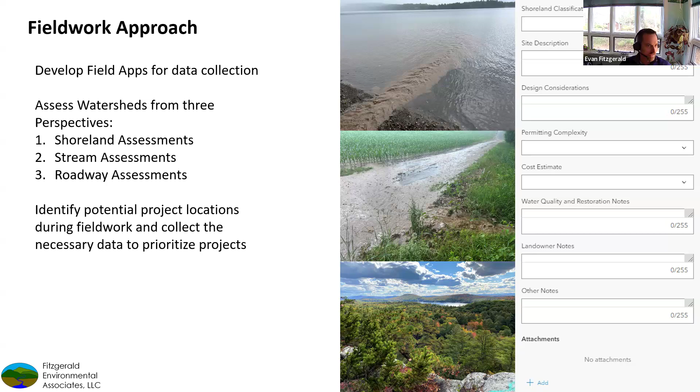Once we identify projects, we start evaluating their costs and benefits and different merits. These are just some examples on the screen of outputs from scoping projects in a little more detail, and then running through what we call a prioritization matrix. That's where we're looking at the water quality benefits of each project and the actual cost. At that point, a pretty preliminary ballpark cost to implement, and looking at some other

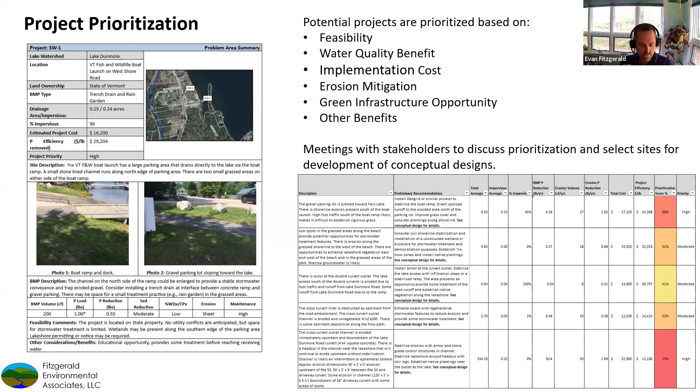things that we weigh with you all as partners in the process of trying to whittle a long list of sites. Typically, we've got like 20 or 30 project sites that we scout. Sometimes more. I think on Dunmore we had like 40 or 50, and then trying to work with you all as partners to whittle that list down to 3 or 5 sites. That was just a recap I wanted to give of how we get to the 30% design.

So once those projects are picked for 30% design, what we're doing next, and I think the first and most important part to make sure the project is feasible and eligible to move forward, this one's pretty obvious: making sure the landowner is on board. And I would say public lands are often where we go first. A bunch of the examples I'm going to show you are from fish and wildlife access areas or town property. And they're an obvious partner because the state or the town are often similarly invested in clean water as you all are as lake organizations. So that's obviously the first and most important step.

Coordinating with landowners too, to make sure they understand as we flesh out the concept design what the changes will be and what they can expect, to make sure there's no major concerns about the proposal up front. That's a really important step. And then on our end as designers and engineers, we're looking to collect more data than what we did in the initial scouting, initial site visit.

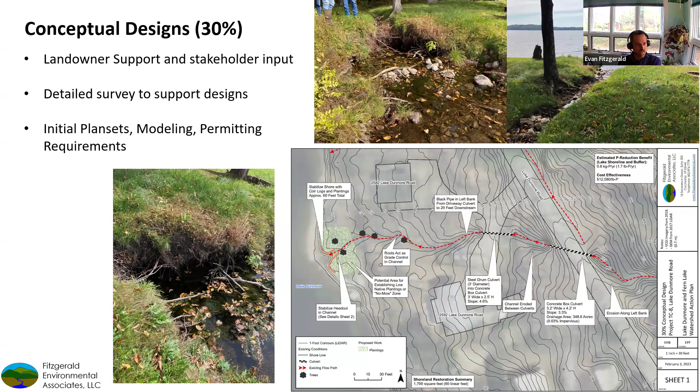So what I wanted to do next was just run through a handful of sites where we went from the concept level design to the final design and then implementation. A number of these are from Lake Dunmore and some of the earlier LWAPs that we did like on Lake Eden, because a lot of those LWAPs that are a little bit older have had more time to advance through the design and implementation process. So this site is the Magoon Boat Access. It's on the west side of Lake Dunmore.

It's kind of a long, skinny parking area. As you can see, it's all sloping down toward the water. And again, these boat accesses are great opportunities often because there's gravel surfaces that are pitched toward the lake, and if we're lucky, there's a little bit of green space in between the parking area and the lake to do a little treatment. So that's what we had here. And you see there's a couple of green areas identified. These were later designed for bioretention basins.

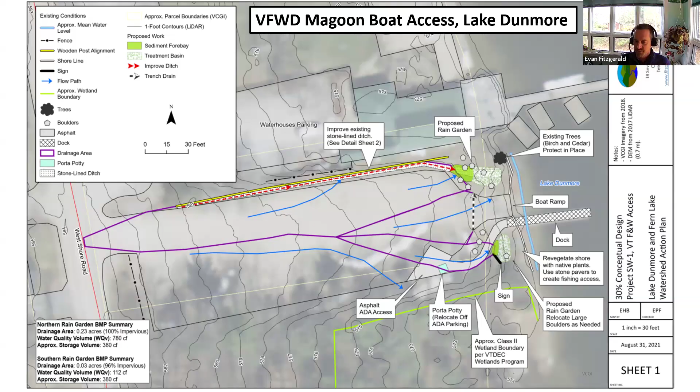And honestly, if I flip from this concept design to the final design, you'll see a change from a more colorful illustration to a more bland, grayscale engineering drawing. It really didn't change that much. But of course, we have to flesh out the level of detail and create what we call contract documents, something that we reference with the contractor, and that, in this case, the Dunmore Fern Lake Association and the contractor and us as engineers overseeing the project can reference and make sure that we're staying on task.

So jumping to the final design, you see we have the trench drain as was shown on the previous version, the couple bioretention basins, and really not a lot of change, just a lot more detail. We fleshed out how big these basins needed to be, at what elevations, what size trench drain, what the swale looked like on the north side, etc.

So here's a few photos of the work shortly after it was completed, and then I think about a year after it was completed when the vegetation was growing in. So to jump from that 30% design to final design, you need more survey data to refine those elevations. You need to identify more clearly the resources that might be of concern to the regulatory folks, where the ordinary high water level is on the lake, where wetlands are and their buffer zones, if there are wetlands, that sort of thing.

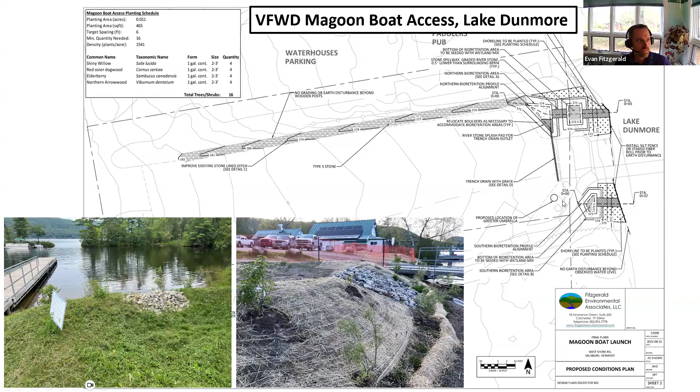That's one example. Here's another example up in Eden. Again, this is a town property. This is the town beach on the west side of the lake. Here's a concept design that shows a small bioretention basin receiving runoff from a portion of a parking lot and a road. And now jump to the actual design. We see a little bit more detail here with what we call a grading plan.

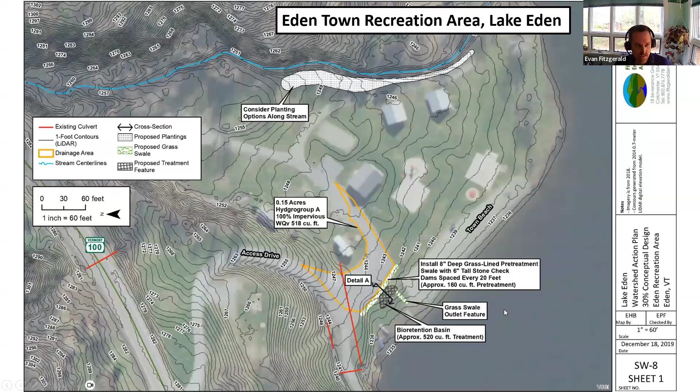All right, going back to Lake Dunmore. This is Branbury State Park, again, public property, working with Department of Forests, Parks and Recreation, another willing partner on these state lands. This is a concept design that shows some shoreline restoration, areas that had been experiencing some erosion. If any of you know Branbury State Park, it's pretty much grass right down to the water in a lot of places. And this project was intended to allow some of that near shore area to revegetate and recover.

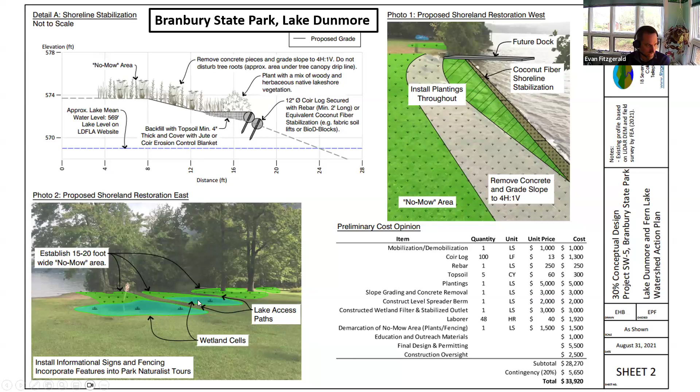Also, there's an area on the property where quite a bit of runoff comes from upslope and passed over what was probably wetland one day in the past. And we were trying to restore some of that wetland and retain some water before it flowed down to the lake and caused some erosion on the shoreline.

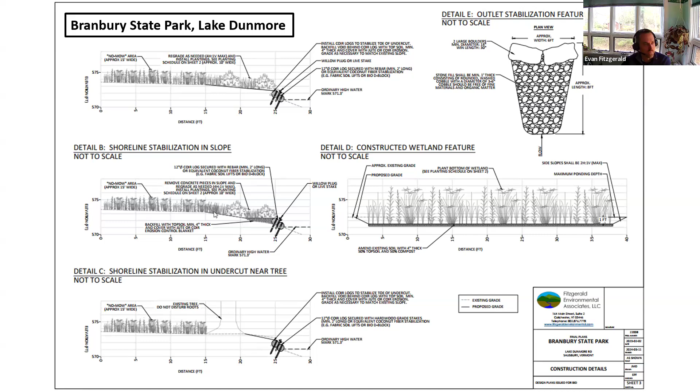And I think I'm getting close to the end of my time, and this is the last project I wanted to show. This is now back up at Lake Eden. I wanted to show this one because it's a little different. It's a stream project. Most of the projects that we've helped partners implement have been right down on the lakeshore, like the others that I showed you.

This one was a pretty unstable stream, borderline intermittent, perennial stream. The bigger streams that flow year round, we call perennial. This one is up on Griggs Road, had a small watershed, 28 acres. But because of the steepness of the contributing area, it did receive a lot of runoff certain times of year and had some unstable banks below the town culvert.

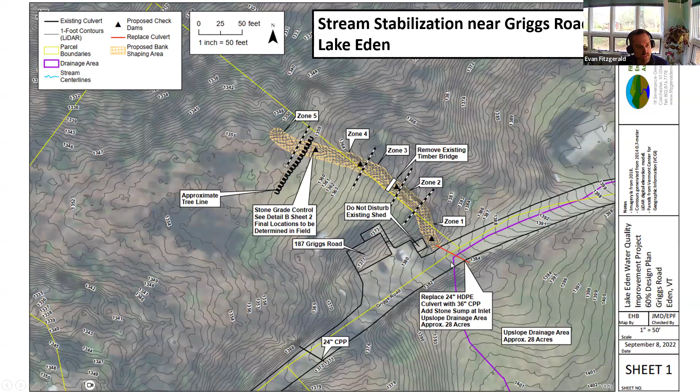So as part of the final design, we collected topographic data along the stream. And again, this is similar to Branbury State Park, where we had some different configurations of banks. We're showing different sections of the channel that had steep areas and not so steep areas.

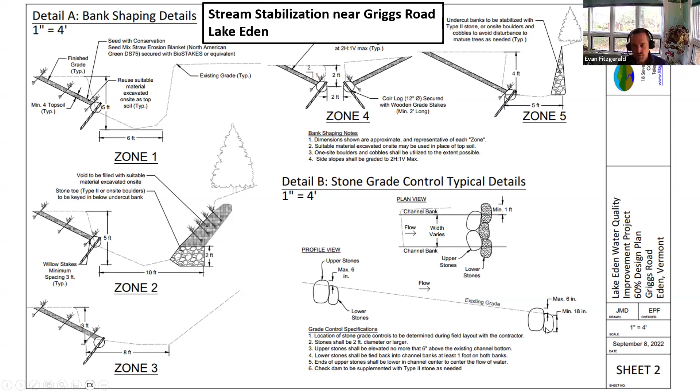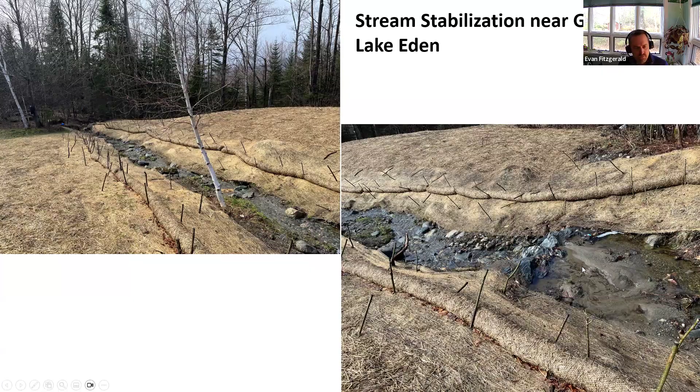And also, we implemented what we call grade control. We set some stones in the bottom of the channel to hold the bed of the channel to prevent it from eroding. And here are a couple pictures of the work right after it was completed. You can see there's one of those grade control structures there in the lower right-hand corner, and you can kind of tell from the photo it's accumulating some sediment there and holding the grade.

So with that, just a quick recap of some things that I was thinking about as I went through these projects. I mentioned public properties are low-hanging fruit in terms of implementation, often willing partners invested in clean water. That's where we've ended up on many implementation projects in the past few years. You know, Dave, I'm sure you can appreciate this, having worked through these.

Number two, having conversations early on with landowners is really important, making sure they understand what those changes are. And sometimes as much as we explain and show them what the outcome will be, landowners need a little extra help seeing that, so that they're not surprised as we move forward into implementation.

Another thing regarding funding, I'm sure you're all quite familiar with this. If the project does mitigate phosphorus loading, it may be eligible for clean water service provider funding. There's a lot of that funding available, and those groups are looking to spend it. So if the project isn't very what we call cost effective for phosphorus, there's still other funding sources out there, enhancement grants, and like Champlain Basin Program.

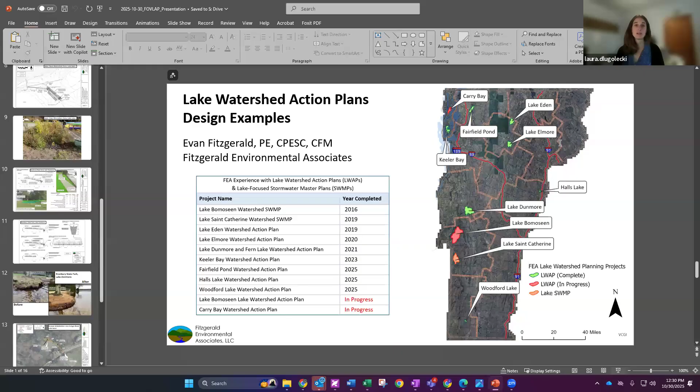There's one more question in the chat. At what stage of the project is the historical assessment requirement addressed? And maybe Laura's going to talk about that. Evan, I don't know, which one of you? You going to talk about that, Laura? I will mention it. Okay. Yeah, I'll mention it, but it's kind of just part of the design phase. So before you're ready to implement, you should have that information ready to go. Okay, thank you. Any other questions?

Yeah, Brent, go ahead. Yeah, it's more of a comment than a question. Just on implementation, if you're doing work on public property, if it's owned by the town, I would suggest, and Evan's familiar with this, that you bring in the public and inform them of what's going on, because we had a project that was on public land, and there was a lot of opposition to doing any work at this one particular area. So I think getting the public involved early really would help. We did not do that.

They kind of came in late and we had to make some changes. But just like I said, just a comment as opposed to a question. I don't know, Evan, if you want to add anything to that. No, I think, yeah, I had your site in mind with that bullet about getting people involved early. I wasn't necessarily thinking about the public, but yeah, when it's a town park property, the whole town is invested, as we saw in your case.

Yeah, I'll just echo that. Evan showed the boat launch area, and we could have done a better job publicizing that as well. Once the project was completed, we got some complaints from folks who lost shoreline where they could launch kayaks and canoes. And had we realized that at the start, we could have factored that into the design.

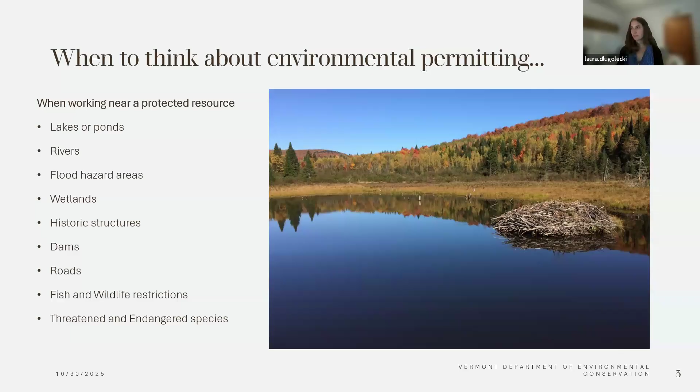So any project that comes out of a Lake Watershed Action Plan or a stormwater plan, basin plan, anything similar, is most likely going to involve a protected resource. Whether that work is near water features like lakes, ponds, rivers and wetlands, or in some sort of specially designated area like a flood hazard zone, or impacts archaeological or historic sites, or is located near important infrastructure like roads, culverts and dams, all of that work on the landscape could come with certain restrictions on what time of year that work could be done, or it might require specific protections or practices, or may require permitting, or all of the above.

So it sounds like what I'm saying is you have to think about environmental permitting for everything, which is kind of true, but the good news is that for a lot of these projects funded with clean water funding or other state funding, there's a phase built into the design phase where the applicants or the consultant you're working with are required to go through a permittability phase, and it's built into this funding process. So they reach out to all the individual regulatory programs and say, hey, here are some of our preliminary designs. Is this something that could get a permit? Would we need to alter this in some way?

So we start before projects get going too far. We can look at the impacts to the natural resources, whether or not a permit would be required, and if a permit were required, is it likely it would receive one. So the good news is that's baked in, and that's not necessarily left to just individuals. But sometimes there could be self-funded projects or funding from non-state resources that might not have that permit regulatory check-in early in the process. So it's good to be thinking about it early so you don't get too far down the line and design projects that maybe wouldn't have regulatory support.

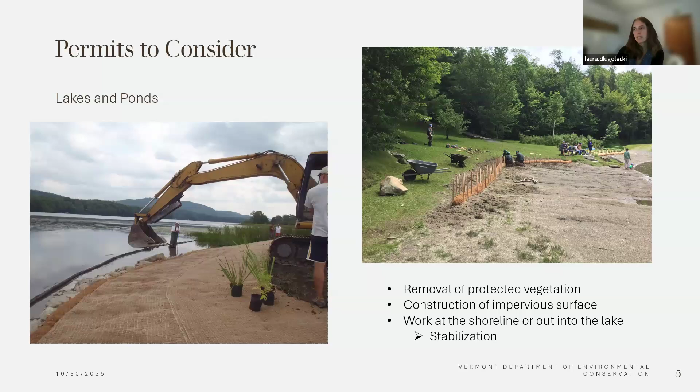A lot of the clean water projects to address erosion occur on the tributaries to our lakes. They may involve altering a stream channel or adding riprap or rock to stabilize the channel. And these types of projects need review by a river management engineer, and they might need a permit. Additionally, there are areas designated as flood hazard areas, and adding material to those areas does require authorization and review. Same with culvert replacement type projects; they would need a review by a river management engineer.

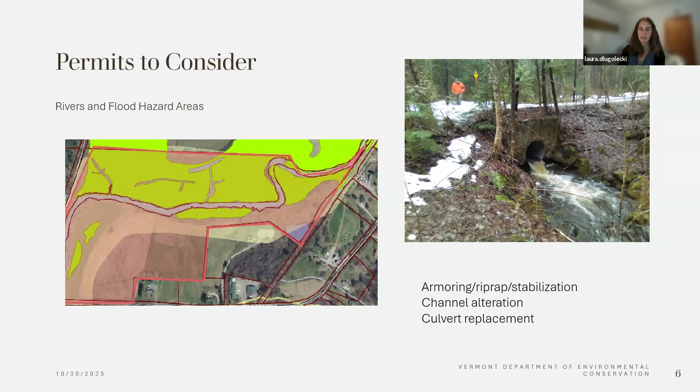And then working near water often means that you could be impacting a wetland. Wetlands are all around us. Projects to address erosion near tributaries and roads often interact with wetlands. Stream crossings, culvert replacements, shoreline stabilization projects, these could all also be in designated wetlands. There's a lot of instances of overlap between multiple regulations. I've been in situations where a culvert replacement project is reviewed by the Lakes and Ponds program, the Rivers program, and the Wetlands program. So there might be a lot of different sign-offs that are needed.

Not every program may require a permit, but they might just need to review and be involved because it's part of their regulatory jurisdiction. So many regulations might have the authority to make a decision. Our programs are really used to working together in these situations, and we try not to give contradictory decisions. But sometimes a lot of eyes might need to be on a project.

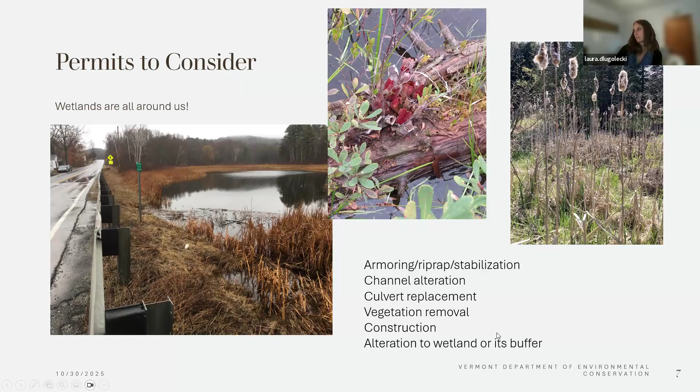Another place outside of culvert replacement that often combines a lot of these different regulatory jurisdictions is on road projects. Improvements and stabilization around roads have to do with how roads interact with surface waters. So those road improvement projects often interact with wetlands and rivers and sometimes lakes. And these projects would need a combination of resource review.

And sometimes stabilization projects near lakes involve lake encroachment because you might have to remove vegetation on the slope to install some sort of toe and regrade the slope to protect the road. So all of that would need lake permitting as well. And then additionally, depending on what type of road, if this is a town road, you might need local town approval. If it's a state highway, you need to work with VTrans. So there's often multiple layers involved.

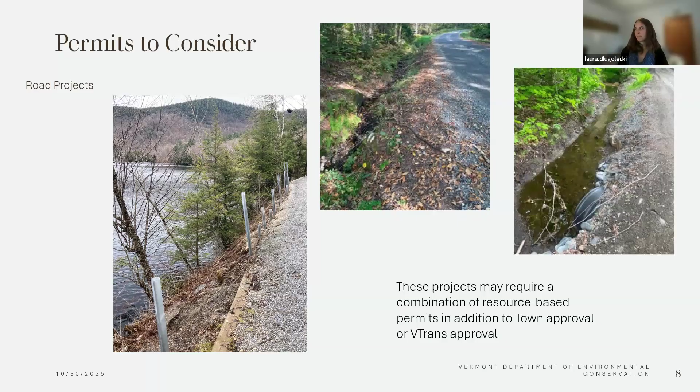And then also built into a lot of these projects is the DEC's coordination with the fisheries biologists in the Department of Fish and Wildlife. A lot of stream projects and culvert projects are reviewed by the fisheries biologists to ensure that fish passage is maintained and improved. There are restrictions about when work like putting rock material or altering a channel or the lake bed can be done to be protective of spawning season. And these dates are different for streams versus lakes. And that's something that we would work with folks on through the permitting process to make sure they understand those

time of year restrictions. We also have a really good understanding of where mapped threatened, endangered, rare plant species and animal species are. So if we come into something like that, we would work with you to maybe alter the location of the project, or sometimes locations can't be avoided and takings permits are issued through the Fish and Wildlife Department.

And beyond these natural resource environmental concerns, we also have our cultural resources. So sometimes these projects may require a review from the State Historic Preservation Office, also known as SHPO. If some of your projects may impact a historic bridge or dam, those are the most common scenarios I see. But I also have seen concerns about impacting archaeological resources. So if you're near a known archaeological site or a historic site, you might be required to have some of these additional reviews and assessments.

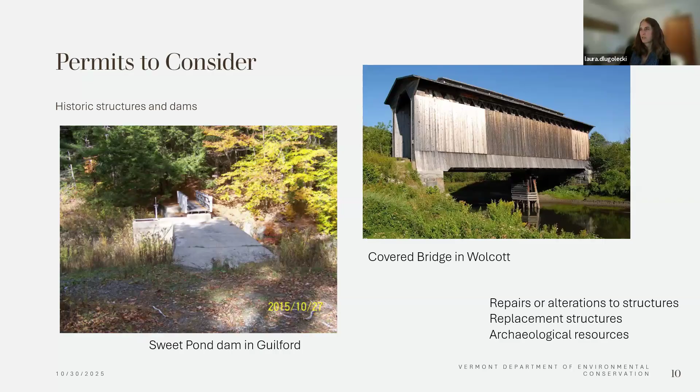And then beyond our state agencies, there are some federal regulations. Most commonly in these types of projects, it's the Army Corps of Engineers. The Army Corps of Engineers regulates surface waters, specifically any projects that put material in or take material out of wetlands. So any impact to a wetland would need some sort of authorization from Army Corps. And this is also true for the placement of material in a lot of the streams across the state, and specifically the placement of material in Lake Champlain and Lake Bomoseen, because these are considered federal navigable waters.

Okay, so that was a whole bunch of regulations, and I'm sure that's very overwhelming to the average landowner. How do we navigate all these different regulations? So I will say that a lot of the projects that come out of these LWAPs and other plans might not require any permitting at all. There are a lot of exemptions. Activities like buffer planting or regrading a road, you're often working in areas that are already impacted, and you are just adding some sort of infiltrative practice or enhancing a site, so they may not need a permit, but there are a lot of folks who get their eyes on this to make sure it's being done with the proper precautions put into place.

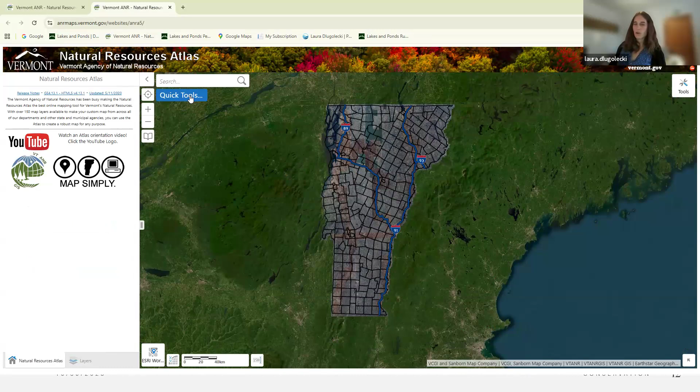And I'll just show you a couple things. I'll start at the beginning here. So if you go to the quick tools on the side, you can zoom to a town or an address. So if I zoom to a town and type in Elmore, it'll take me there, and say I want to zoom into Lake Elmore.

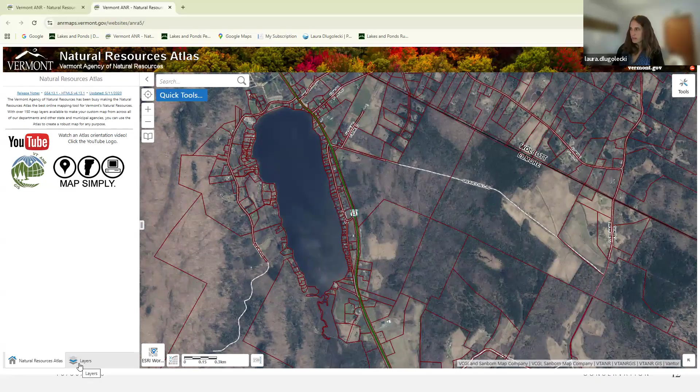I can start to see these red lines are all the parcels. And if I go over here to the layers, there's all kinds of information here. So if I were to go to the Watershed Management tab, I can see where the protected shoreland area is. So this is the 250 feet of protected shoreland where shoreland permitting is required.

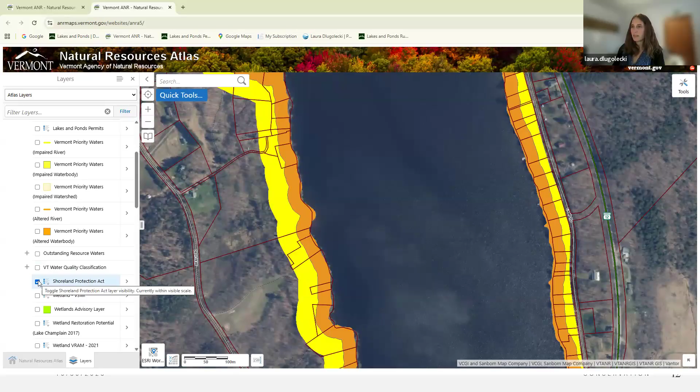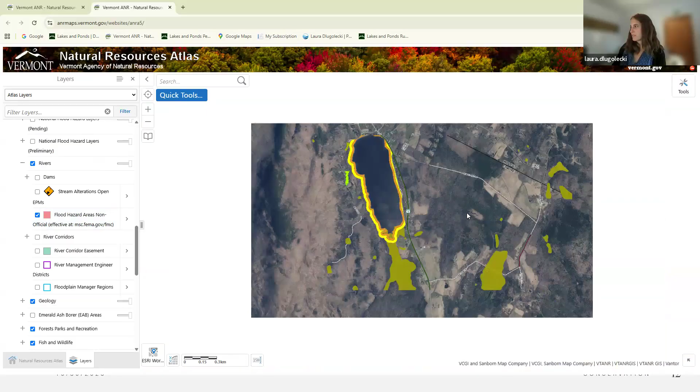I can look at where the wetlands are. I'll zoom out just a moment. You can see where mapped wetlands are. Under rivers, I can see where flood hazard areas are. Fairly certain there's some mapped flood hazard areas. I can see where the dams are. Let's see, there's the dam right there.

So there's a lot of information to help you. You can see where culverts are. There's a lot of information on here that can just give you some basic screening information to help you think about like, oh, well, there are some wetlands near here, or there is a flood hazard area. Again, we're always here to help.

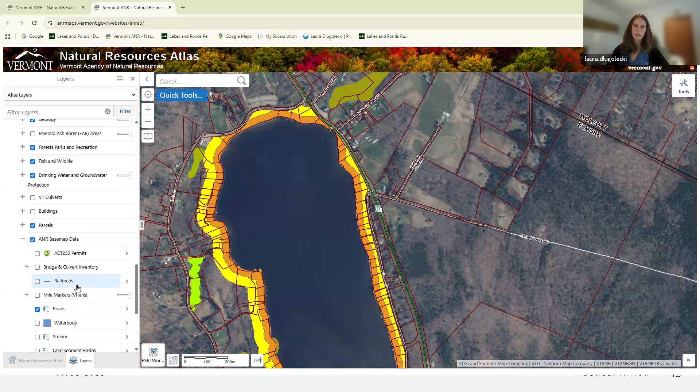Let's see. Okay, I hope I'm back on my presentation so you all can see. Okay.

And then as far as timelines go, it's a really good idea to have the permits in place before your project start date, and to think about permitting, at least conceptually, while you're designing the projects. Within our Watershed Management Division, it can take anywhere between a month and a half to 6 months to get some of these permits. So you do need to start thinking out and planning. One of the reasons some permits take a long time is that most state permits in Vermont are required to go on a 30-day public comment period, so that's built into this timeline.